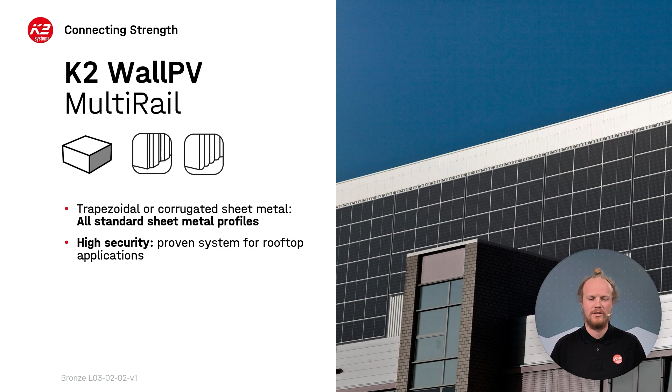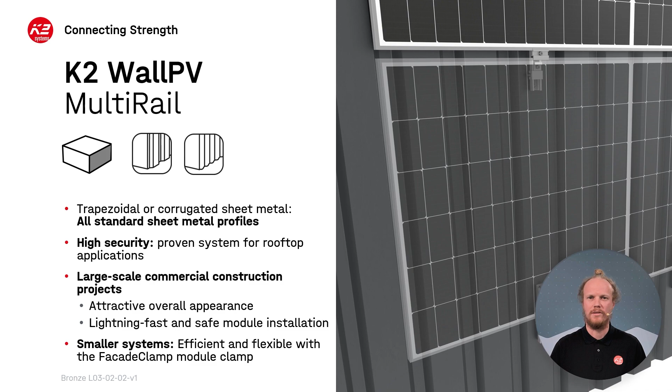Designed specifically for trapezoidal and corrugated sheet metal, the MultiRail system is something we've taken from the rooftop section, where it's high security and has had a number of years of proven success. In combination with the insertion rail, it's suitable for large-scale projects with an overall aesthetic and lightning fast installation. For smaller projects, an efficient installation is possible with the facade clamp, making it the perfect solution.

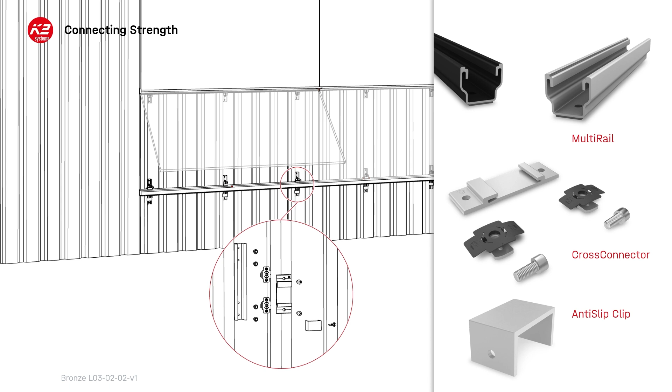Moving on to the components now, and starting with the MultiRail insertion rail, we have a number of components that you may recognize from the rooftop sector, including the MultiRail 25, both in black and silver. We also have the cross connector set utilized with our insertion rail systems, and this is connected with two MK2s and M8 bolts. The anti-slip clip also then sits underneath the cross connector set, ensuring that extra layer of security.

Of course, we have the insertion rails themselves, both in black and silver. These are suitable for 30mm module frames and 40mm module frames. The end stops, which sit at the end of the insertion rail, the rail connector set sitting between the rails, and of course, the insertion rail cover sitting at the bottom of the rail and top of the rail for that final aesthetic touch.

The module safety sits between two modules and ensures that there's a standard distance between each one. The FixStops sit either side of the cross connector set, ensuring that there is no horizontal movement of the rail, and the spring plug, which will sit in a couple of cross connector sets, ensures that there is no vertical movement. The TerraGrif can be used if there is any need for earthing or bonding on the system.

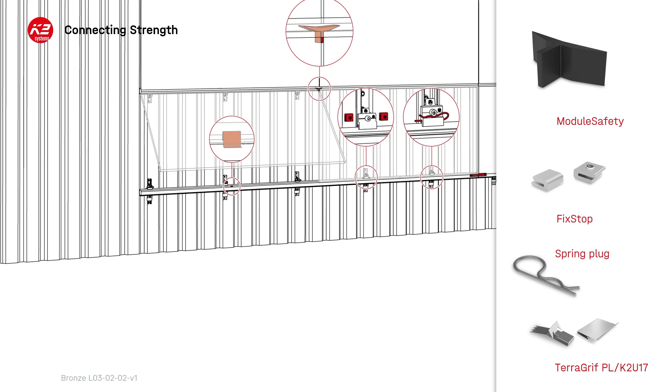Moving on to the MultiRail facade clamp, let's take a look at some of the key aspects of this system. It's a cost-effective solution using module clamps rather than longer rails. In combination with the module support, modules can be hung before being secured. With fewer and smaller components, this makes transporting quite easy, reduces the transport costs and makes all of the logistics a much more simple process.

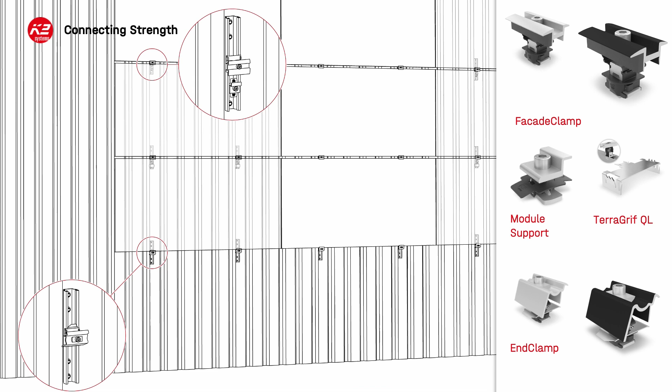Now taking a look at the components of this system, we're still going to utilize our MultiRail, but this time in combination with the facade clamp, which has been specifically designed for wall PV installations. The module support as well is specific to this system and is used to hold the module before the module is secured with the clamp. If you would like to use earthing or bonding, this is also possible with the TerraGrif. And the end clamp is the clamp we use for our rooftop solutions, coming in silver and black.

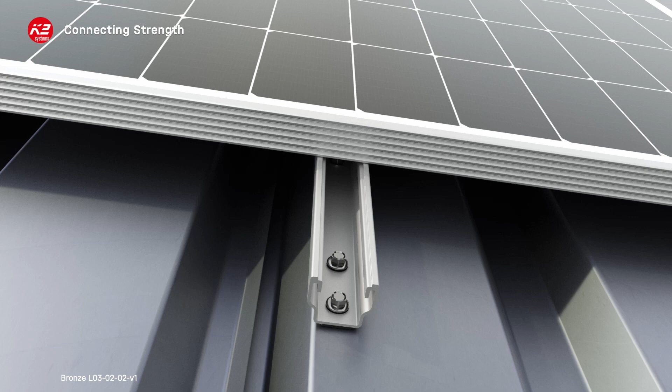Now let's take a look at the MultiRail assembly in this brief animation. The MultiRail, being fixed to the facade with 2 screws, will hold the module support, which sits at the second MultiRail off the bottom. This will then hold the module, where we can then fix it with the clamps, and the anti-slip clip will be installed as a final level of security. Placing the modules across the facade, we can then work our way in rows, filling up the whole wall.

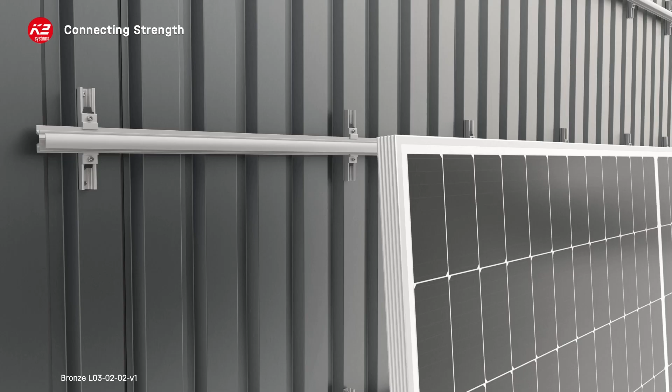With the insertion rail, similarly, we'll fix the MultiRail first. The cross connector will then be fixed to that with the two MK2, with the insertion rail sliding into the cross connector. The modules will then sit nicely in the insertion rail and be secured at the end with the end stop, and we can work our way across again before working our way up and then finishing the facade in this process.

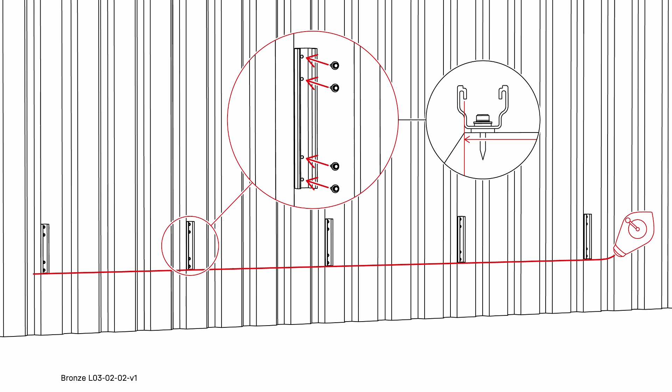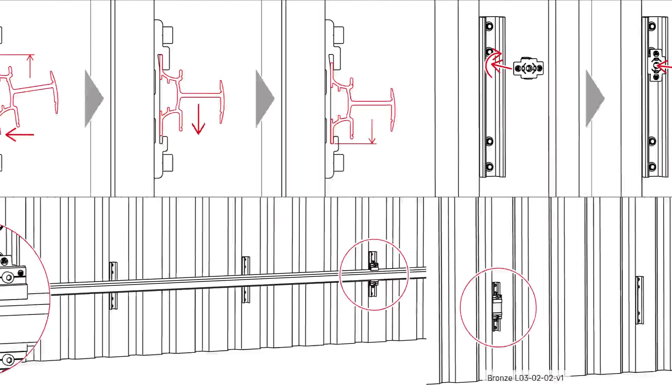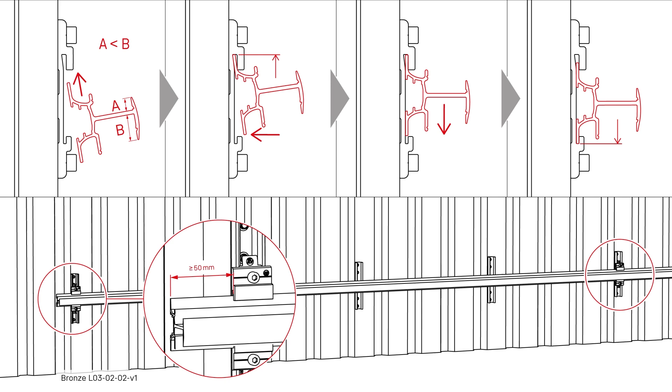Taking a closer look at the installation, all of the MultiRails need to be installed at the same level. From here, we can put the cross connector sets in on the first and the last MultiRail. From there, we can put in the insertion rail with this asymmetric function of sliding up and then sliding down. Gravity will then hold this in place before we do the next modules or the next row of insertion rail.

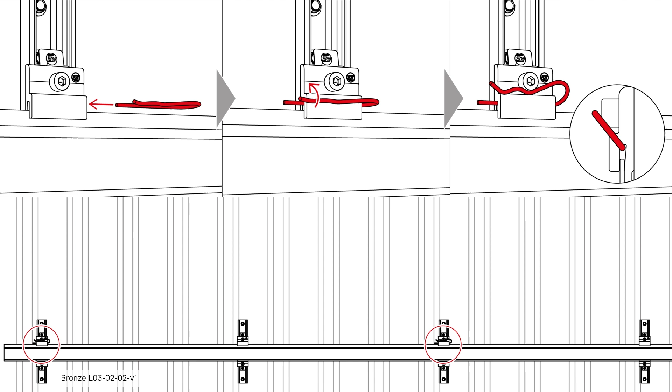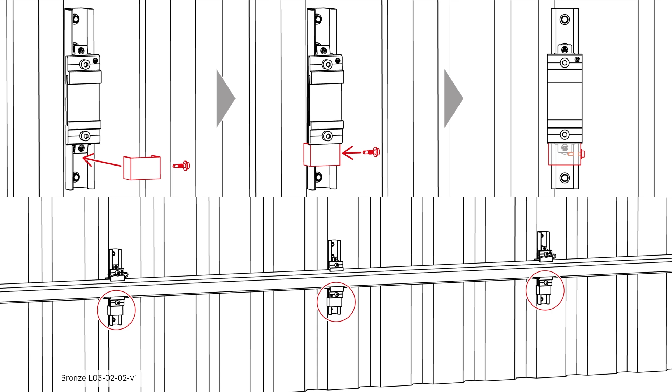The split pin will be installed on a certain number of cross connectors. This will be specified in the assembly instructions or the base report. The purpose of the split pin is to ensure that there is no vertical movement of the insertion rail and it sits snugly in the cross connector set. The anti-slip plate is placed underneath the cross connector set as a final safety to ensure the modules are securely on the facade wall.

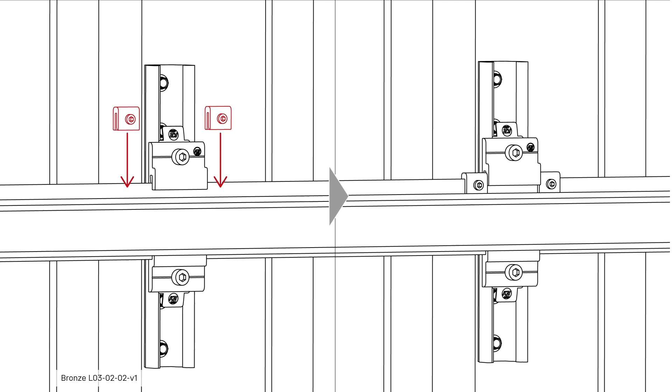The fixed stop will sit on either side of the cross connector set. Depending on the composition of the rail, you may need to use the fixed stops only in the middle of the rail or perhaps also at the end of the rail as well. The purpose of these is to stop the rail from moving horizontally across the facade over time with thermal expansion. The end stop will sit at the end of the insertion rail and ensures that the modules are snug and will not move horizontally across the insertion rail.

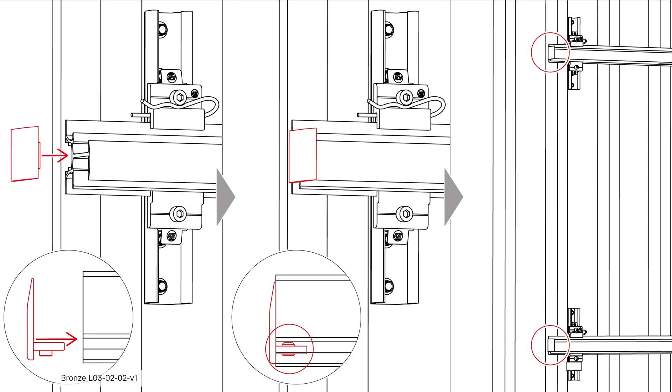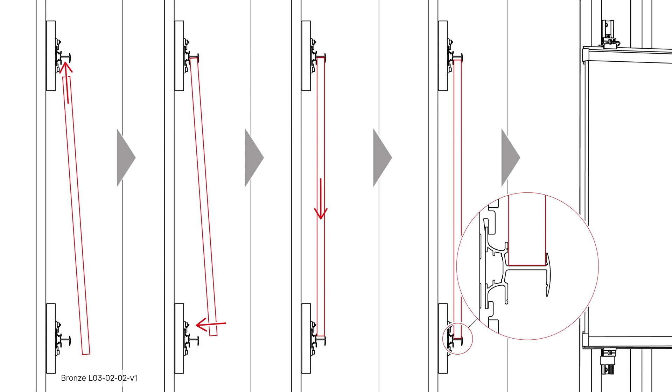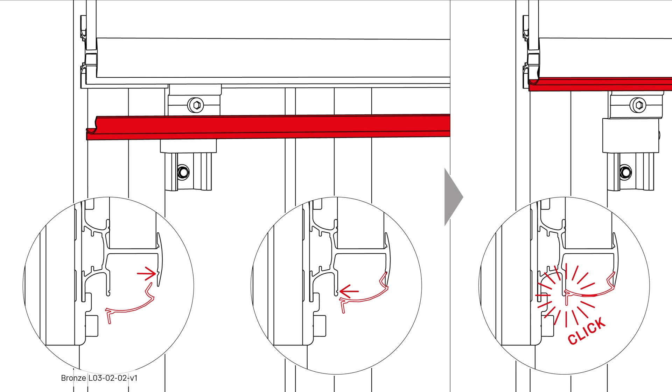Installation of the modules is easy with the insertion rail. Simply slide the module up into the top rail and then slide it back down into the bottom. The asymmetric profile allows for this easy installation, yet provides a secure location for the module to sit on the facade wall. The module safety is then placed between each module and provides a standard distance between all adjacent modules. It also reduces any movement of the modules if there is high wind in the region. Finally, the rail cover can be placed on the bottom with a firm click to ensure that it's in place securely.

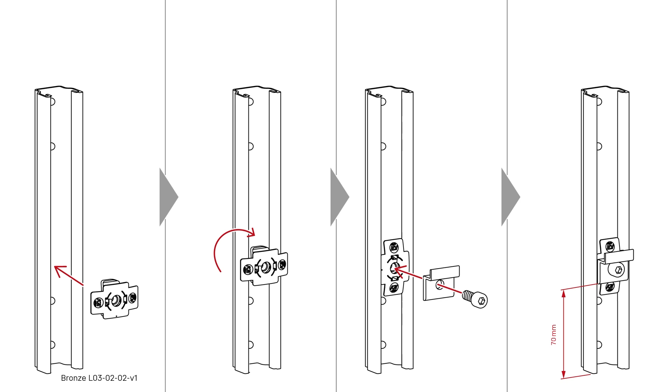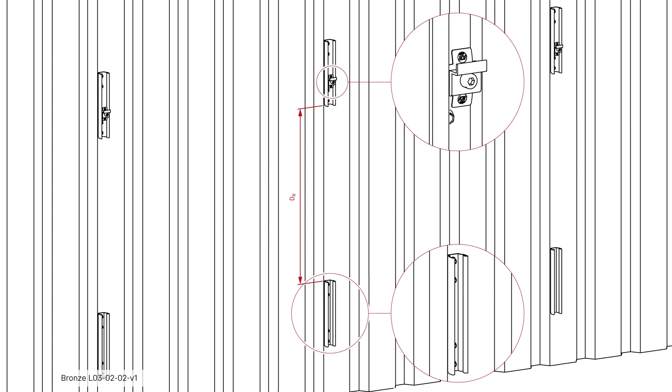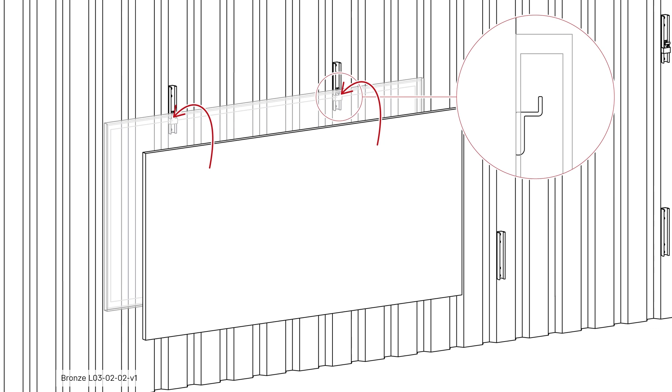Let's now take a look at the facade clamp assembly in a little more detail. Starting with our MultiRail, we will place the module support on this at a distance of 70 millimeters from the bottom of the MultiRail. The module support needs to be placed on the MultiRail second from the bottom, with the distance between MultiRails being determined by the width of the module. The anti-slip plate will be placed underneath the module support, and from here we can hang the module before fixing it with the facade clamp. Following this process, we can work our way up the facade, installing the modules, and then across the facade.